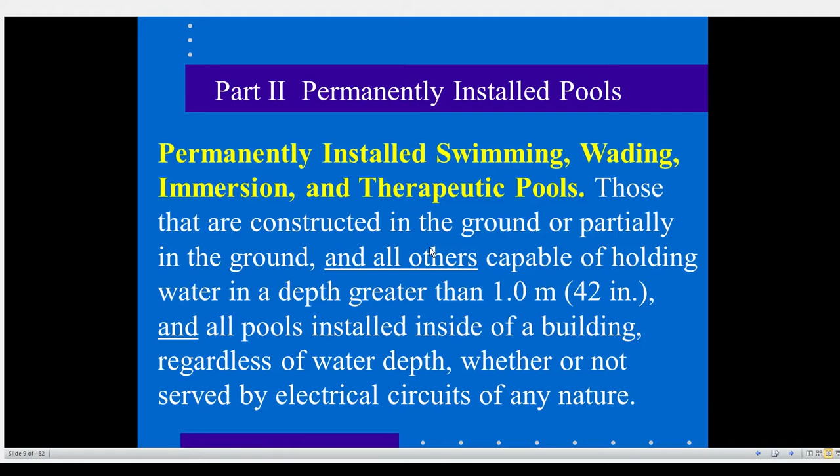And all pools installed inside of a building, regardless of the water depth, whether or not served by electrical circuits of any nature. So it doesn't matter whether electricity is to it or not. Okay, so if it's in the ground, partially in the ground, or it's inside of a building, and it's capable of holding water at a depth greater than 42 inches, then it's going to be considered a permanently installed pool. And these are what you have here.

This right here is partially in the ground, so it is still permanently installed. This one's all in the ground. Here's some indoor ones. Remember we said it doesn't really matter on that. All indoors are considered permanently installed pools. Here's a pool right here that's actually not a polymeric wall. This is more of a rigid construction. But beyond that, its depth is 48 inches. So since it is beyond 42, it is not designed to break down like a storable pool.

In fact, they come in here and weed eat around it, I guess. So these aren't inflatable or polymeric sidewalls. These are rigid sidewalls, with structural framing members. This is a permanently installed pool by virtue of depth and by virtue of the fact it doesn't meet the storable pool requirement. So what is a storable swimming pool?

Storable swimming, wading, and immersion pools, or storable portable pools, spas, or hot tubs, are those that are constructed on, that's a key component, on or above the ground, and are capable of holding water to a maximum depth of 42 inches. So if it's on or above and it holds only up to 42 inches of water, then we've got a storable pool. Or a pool, spa, or hot tub with non-metallic molded polymeric walls. That also is going to be restricted to up to 42 inches in order to be considered a storable pool.

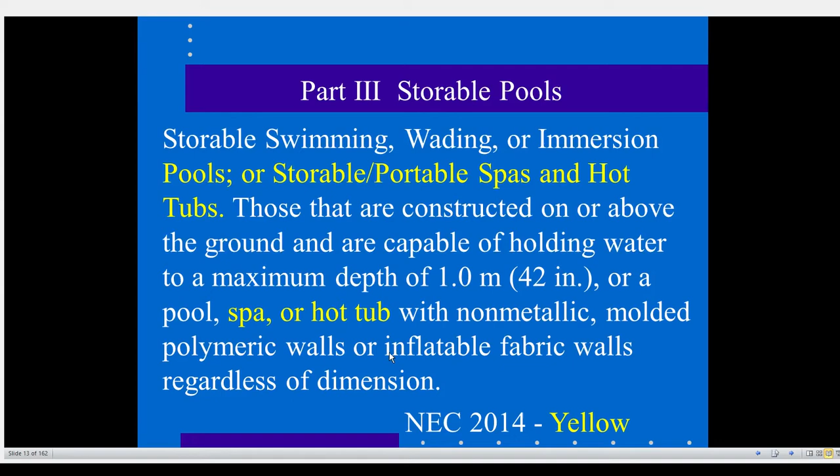And then, of course, you go on to say inflatable fabric wall, regardless of dimensions. Doesn't matter how deep the pool is at that point. If it's an inflatable fabric wall type of pool, we'll see a picture of one in a minute, then it is a storable pool. And there's the storable pool right there.

Now, the one thing to remember in these pools, again, we use an example of this pool here. These are not polymeric walls, I can promise you that. This is the rigid support. This is not designed to be broken down. But I will remind you that if it's a storable pool, it has a maximum depth of 42 inches. If it's a permanently installed pool, it's going to be more than 42 inches. Or if it's in the ground or partially in the ground, it's automatically going to be considered a permanently installed pool.

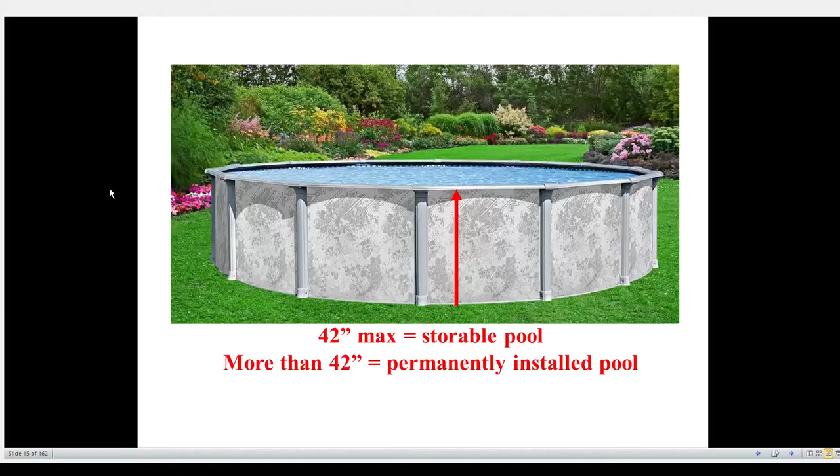In certain parts that we get to later, we're going to be dealing with spas and hot tubs. So what is a spa and hot tub? Well, a hydromassage pool or tub for recreational or therapeutic use, not located in a healthcare facility, designed for immersion of users, and usually having a filter, a heater, a motor-driven blower, what have you. It may be installed indoors or outdoors.

It's kind of irrelevant. Obviously, you're going to see later when we talk about outdoor spas or indoor spas, whether or not they're listed for outdoor and some of the applications for their use. But it'll be installed indoors, outdoors, on the ground or supporting structure, or in the ground or supporting structure. So it could be actually in the decking material or in the patio, if you will.

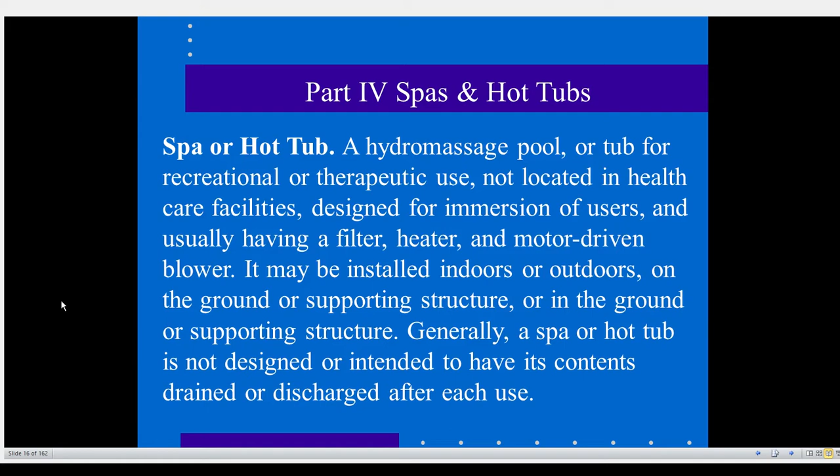Generally, a spa or hot tub is not designed or intended to have its contents drained and discharged after each use. So that's an important concept here. You're not going to drain these after. These hold hundreds of gallons of water, so we wouldn't get into that. Unlike a hydromassage bathtub, which you would drain every time.

We're going to get into spas and hot tubs. There's a difference in packaged units. It's a packaged spa and hot tub equipment assembly. It's a factory fabricated unit. It consists of water circulating, heating, and control equipment. Notice it has heating on it, different than a hydromassage bathtub. On a common base, intended to operate a spa or hot tub.

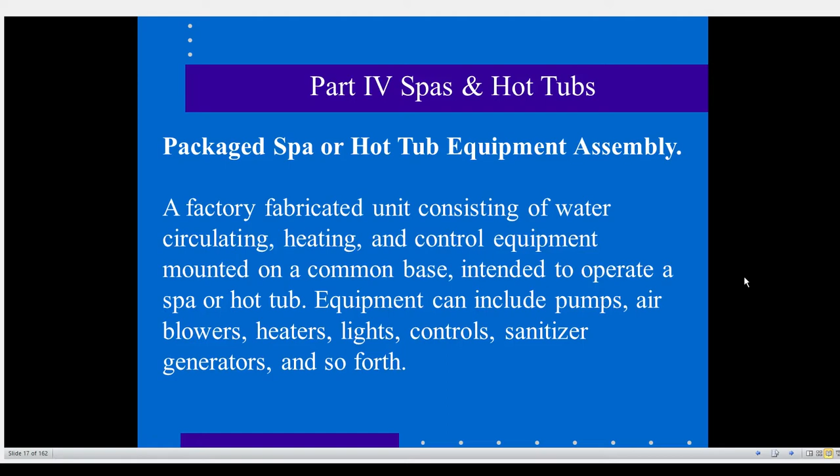Equipment can include pumps, air blowers, heaters, lights, controls, sanitizer generators, and so forth. That is your packaged unit. So here's your packaged unit here. Sits on the deck, sits on the surface. And here's one that actually is going down through the structure.

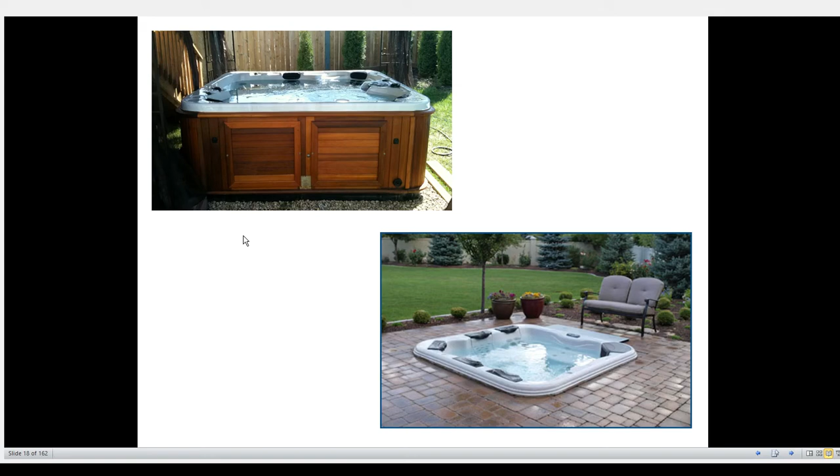Part 5, we're dealing with fountains. We're going to talk about fountains. One thing to remember when we get to fountains is that fountains, ornamental pools, display pools, and reflection pools, the definition does not include drinking fountains, so don't think of fountains and drinking. That you want to deal with 422. You're going to go over to appliances, and they're going to deal with your drinking fountain application.

Permanently installed decorative fountains and reflecting pools. Those are constructed in the ground, on the ground, or in a building in such a manner that they're not designed to be disassembled for storage. They're permanent. They're supposed to stay in place, okay? Portable fountains, you're going to see something that's going to require you to deal with 422. That's not what we're talking about here. These are permanent fountains.

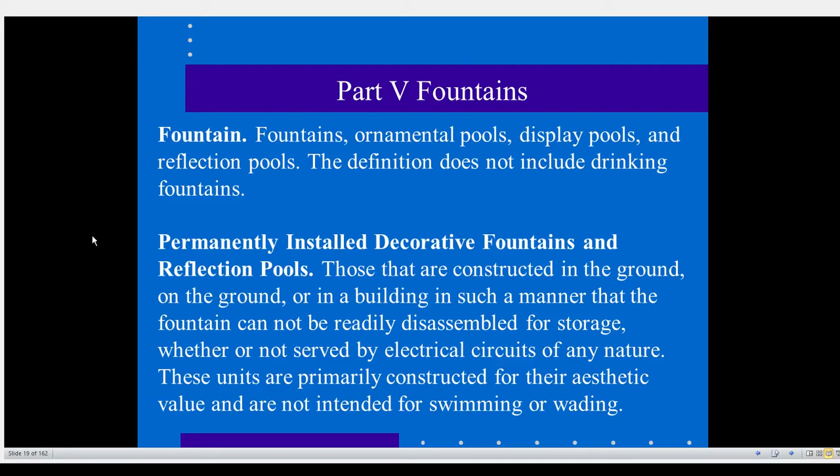All right, and then we're going to deal with pools, tubs, and therapeutic uses. So this is part 6 here. Packaged therapeutic tubs and hydrotherapeutic tank equipment assembly. We will talk about that in brevity when we get to those areas. Basically, they're factory fabricated units consisting of water circulating, heating, and control equipment mounted on a common base. Sounds pretty close to what a normal hot tub would be, right? Intended to operate a therapeutic tub or therapeutic tank. Equipment can include a pump, air blower, heaters, lights, controls, sanitizer generators, and so forth. But these are going to be used for therapeutic or hydrotherapeutic use.

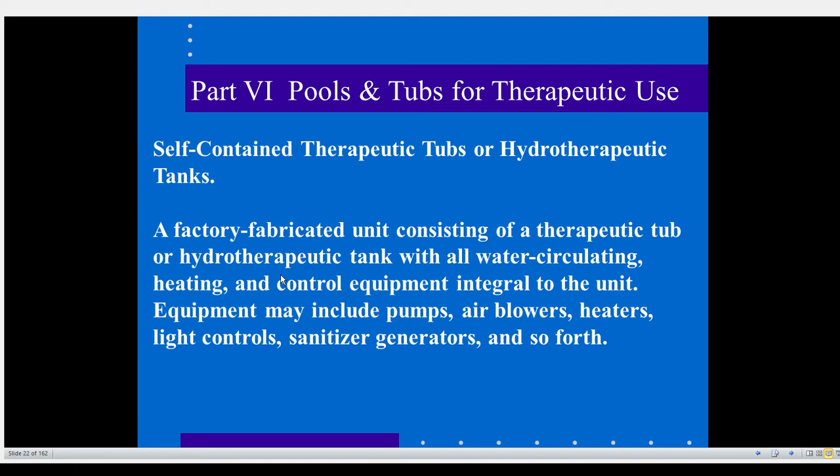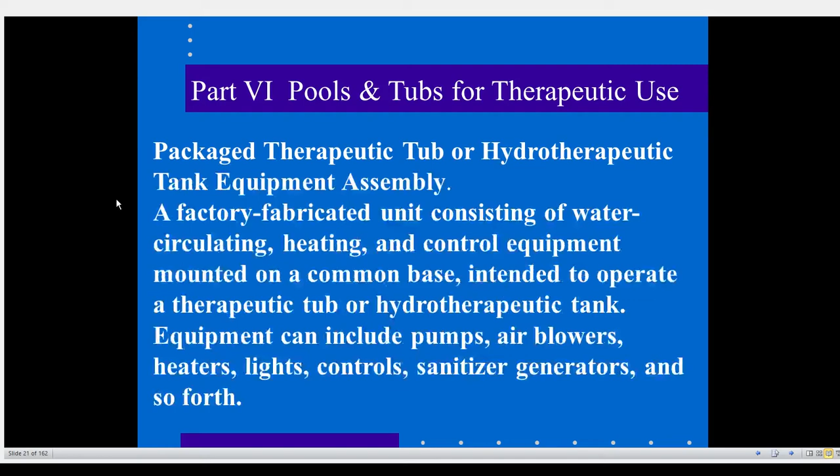Hydromassage bathtubs. Part 7: a hydromassage bathtub is a permanently installed bathtub equipped with a recirculating piping system. That's the plastic piping that typically goes around the bathtub. Pump and the associated equipment. It is designed so it can accept, circulate, and discharge water on each use. So it's not designed like a spa in order to keep the water in there.

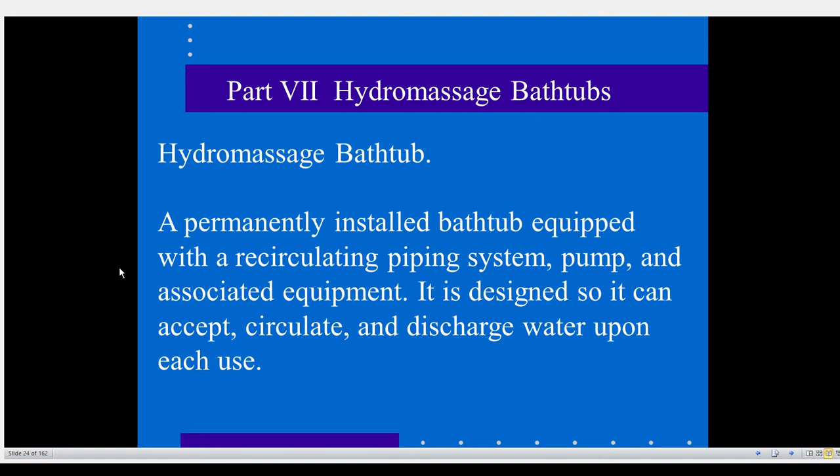All right, so we're in part 1. We want to talk about 680.5, ground fault circuit interrupters. So what are we talking about here? Well, here we've got 3 of them. Remember later when we get to storable pools, when we have a 15-foot cord, for example, and it has integral GFCI protection. This is one of those that's a self-contained application. But you have circuit breaker type and you have receptacle types. All of them are listed, and they are providing the GFCI protection.

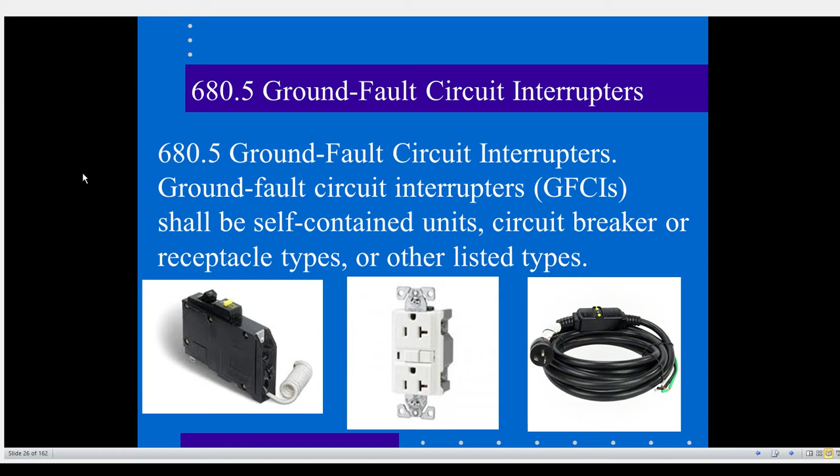It's important to understand how GFCIs, even the receptacles, are wired. Here's an example to show you the power coming in, going to the line side of a GFCI, and then you've got the load side of the GFCI that protects all the receptacles downstream. Now, one thing to remember is even this receptacle, if there were no load side terminations, it still would be GFCI protected, okay? And you test it here. There's a test and a reset button right on the front of it. But just remember there's a line and a load application here.

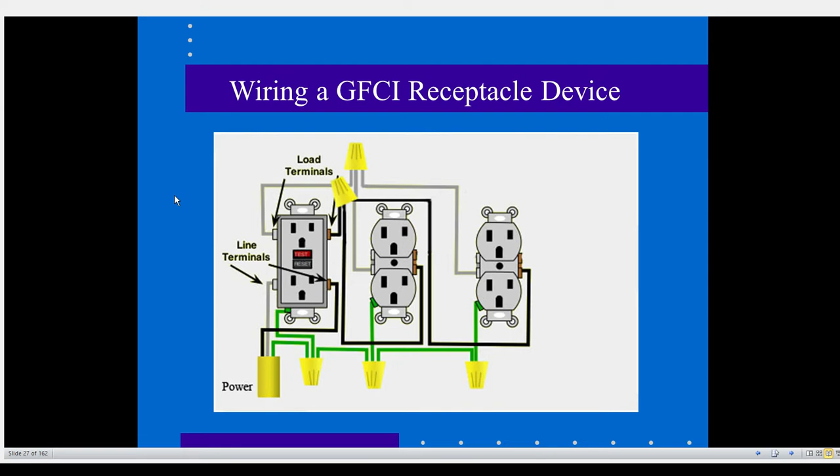All right, when we're dealing with grounding, 680.6. 680.6 dealing with grounding, it says electrical equipment. Now, again, one thing to remember is that Article 250 still takes some important understanding. Chapters 1 through 4 are still going to be the general chapters that have to be enforced generally throughout the code. However, 5, 6, and 7 can modify. And in fact, they modify themselves.

Now, the one thing that's going to remind you that when you're dealing with grounding in 680, you still have to meet Parts 5, 6, and 7 of Article 250, and obviously anything that adds to that in 680. Okay? So you have to remember that. And that can come into play also when we're dealing, like in 680.26, with the equipotential bonding grid and all those requirements. Remember that's a bonding component, that's a localized thing. Don't confuse that with the grounding of a structure or electrodes. Don't get the two confused.

Totally different aspects here. However, you do have equipment that's going to be associated with all of these areas within 680, and there's going to be grounding requirements, most notably equipment grounding applications. So, the code says in 680.6, to just remind you up front, electrical equipment shall be grounded in accordance with Parts 5, 6, and 7 of Article 250 and connected by wiring methods of Chapter 3. So they're going to be those that are listed in Chapter 3, like your rigid, EMT, all those kind of things. Except as modified by this article. So again, 680 can do some modification to those Chapter 3 methods.

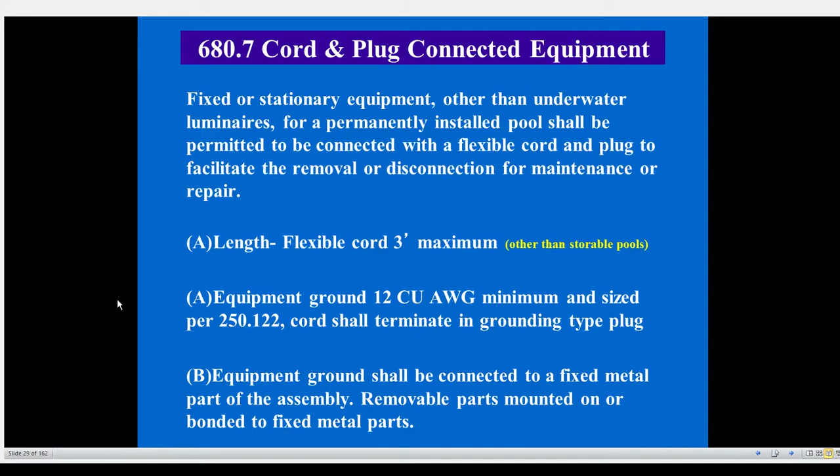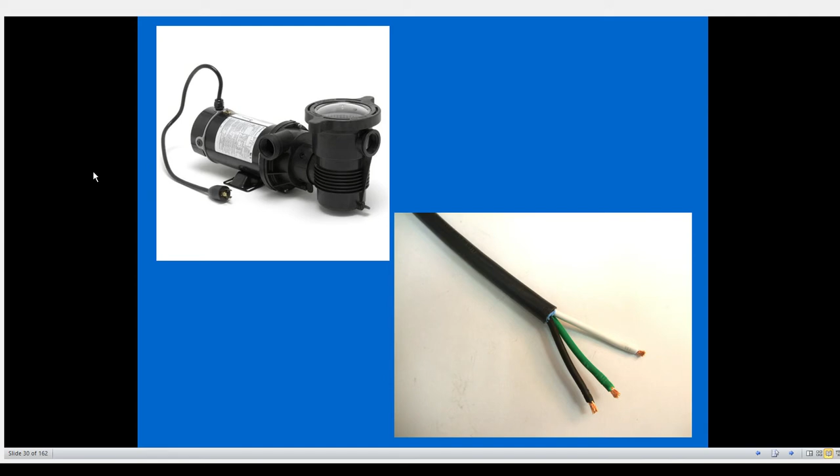Here's a picture of a pool pump here. This is actually a listed pump, listed by a third party, UL, on this one. Notice it says this pump is for use with permanently installed pools only. Do not use it on a storable pool. So that information is right there. That is very beneficial. And you'll notice that it says here that it's for above ground pool pumps. So there's some information on there that's going to give you guidance on how you install this and where it's to be used. Obviously, if a cord was used for this, then it's got to be 3 feet or less.

All right, let's talk about overhead conductor clearances, 680.8. Now, we have an A, B, and a C. We have the communication systems application here, we have the network-powered broadband communication, and we have normal power. Okay, the one I'll go to first is B, so we can knock this one out of the way.

The code says that communications, radio, and television coaxial cables within the scope of Articles 800 through 820 shall be permitted at a height of not less than 10 feet above swimming and wading pools, diving structures, and observation stands, towers, or platforms. So you have a flat-out 10-foot minimum on these communications, and those dealing with 800 through 820 are going to fall in this clearance.

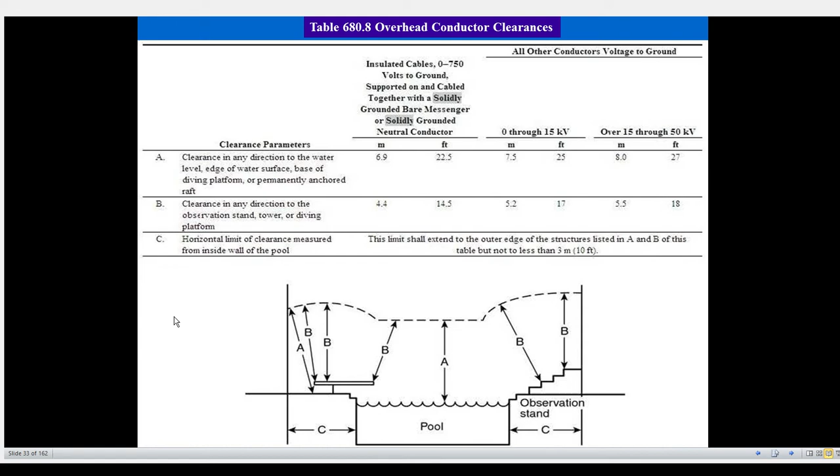Once you start getting down here, you know, it's different. You're not getting a clearance here. This is the limitation mark. Okay. So hopefully that cleared that up and people understand the clearances over the pool application.

All right, 680.10, underground wiring locations shall not be permitted under the pool or within the area extending 5 feet horizontally from the inside wall of the pool. Okay, so no wiring goes within that 5 foot perimeter around the pool. Nothing.

Now, what about if I've got some lighting? Obviously, I do. What if I have some wet niches, which are not required, but if I did have them? I've got wiring now that I've got to get down there to that pool equipment. So, unless this wiring is necessary to supply pool equipment permitted by this article. So, this is telling me that I can go into that 5 feet if I'm supplying the wiring methods to get down to the necessary pool equipment.

One thing I'll remind you: once you get into this 5 foot zone, the depth requirement for that wiring method that gets down to that necessary pool equipment has to be in accordance with 300.5, not 680.10. So what are the cover requirements in 680.10? That leads us to the last paragraph. You can't have any wiring in the 5 foot perimeter, but if you've got to run branch circuits to the pool equipment, then we'll let you put it in there. You've got to meet the depth requirements of 300.5, which is the normal underground raceways and cables requirement.

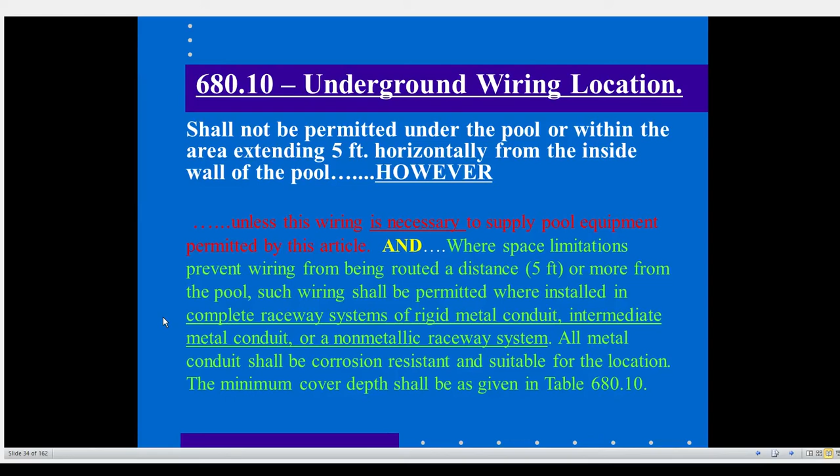Now, why I think this is correct is because in the 2017, I believe, they're going away from the table and they're going to reference 300.5, because those depths are pretty comparable to what we have here in 680.10, with the exception probably of the non-metallic one. I believe it's 4 here, and they've got it 6 here, so a little more restrictive in 680.10. But again, you've got a 4-inch slab over top of it. So I think you'll see in 2017 this table disappear. Could be wrong. But at any rate, this depth has to do with those raceways that are there because of spatial limitations.

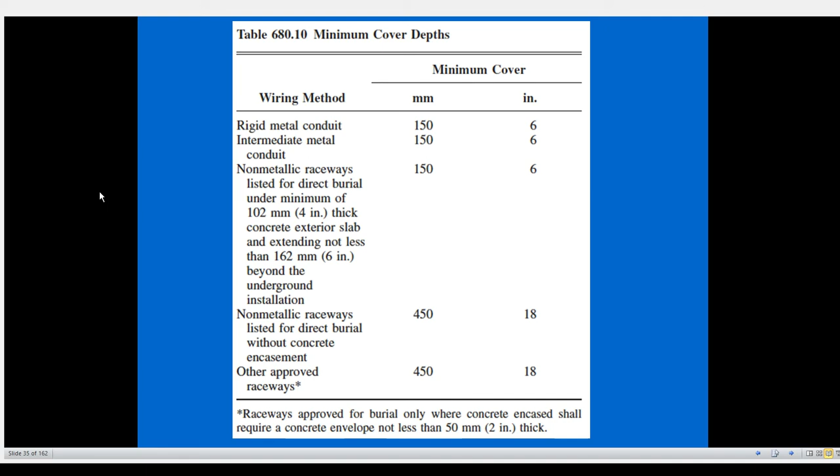680.12, maintenance disconnecting means. You're going to see this referred to in fountains, in spas and hot tubs. You're going to see this a lot, and you need to understand what we're dealing with here.

What it says is, one or more means to simultaneously disconnect all ungrounded conductors shall be provided for the utilization equipment other than lighting. So if it's a spa, for example, and I've got a 50 amp, 240 volt application, that disconnect needs to simultaneously disconnect those ungrounded conductors.

So that's kind of what we're talking about here. Now, each means shall be readily accessible and within sight, and within sight is a defined term in Article 100. Shall be within sight from the equipment and shall be located at least 5 feet horizontally from the inside wall of the pool, spa, fountain, or hot tub, unless it's separated from the open water by a permanently installed barrier that provides a 5-foot reach path or greater.

In other words, in order to reach around it, it's going to exceed the shortest path required to reach that disconnect. It would be equivalent to being 5 feet. In other words, you can't reach around and get it from sitting in the pool, spa, or hot tub, or what have you. Okay? And fountain was added in 2014, so you can see that change there.

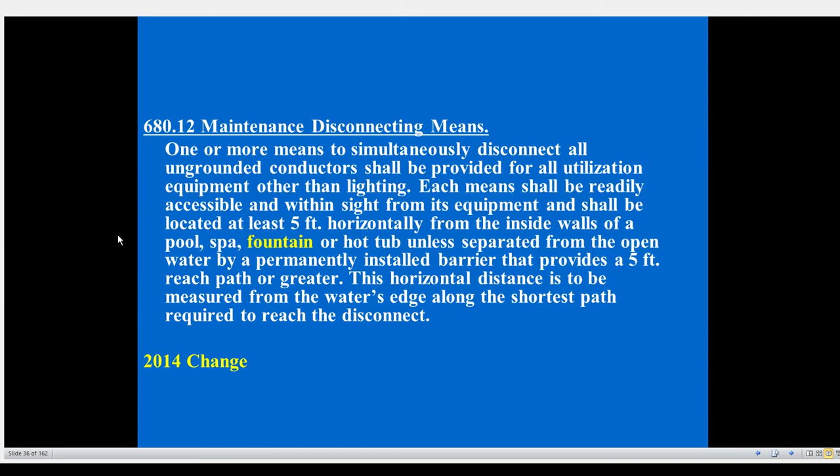These are all examples of disconnects that could be used. This snap switch right here could be used as a disconnect, like for motors or pumps, if it's a horsepower rating that's adequate, depending on the size of the motor and what have you. You got a pull-out disconnect which might be able to be used. You got this panel here which might be within sight and could serve the purpose. And then of course you have a typical cutout box like this that could serve that purpose.

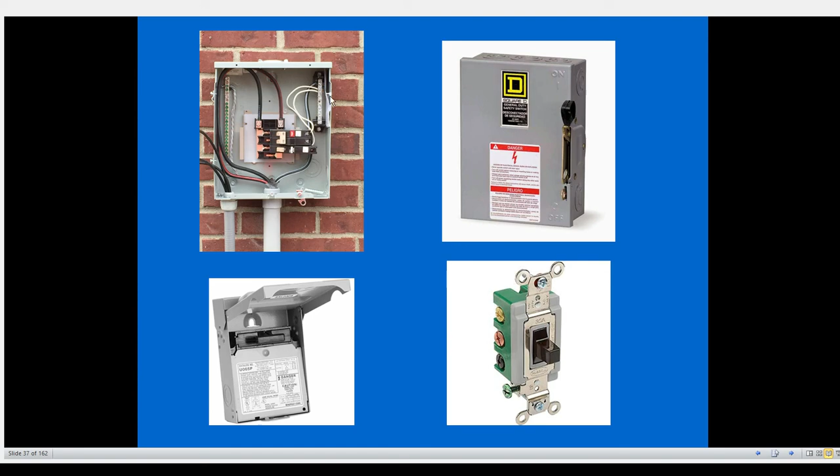Obviously make sure that it is rated for the location where it is to be installed. So the switch would be in an FS wet location box. This looks like a NEMA 3R enclosure. This looks like this has NEMA 3R applications to it. And this, I do see some knockouts, but I think this is also a 3R application, might even be more than that. But anyway, this is the disconnecting means as well. So all of these could be acceptable depending on the location and where you install them.

All right, so let's come on back here to me.

All right, so you made it through part 1. Now when we get to part 2, 3, 4, 5, 6, and 7, we might redundantly go back and talk about some of those definitions so we can make sure we understand where we're at. Hopefully you've built on this by watching part 1 here, and then we'll go to part 2 and part 3 and so on. And that gives you something to build on, because if I do it this way, then you can come back and watch it at a later date and watch whatever part's more important to you.

Rather than sit and watch the whole thing, if I have an application where I only need to deal with a hot tub and spa, then I can go and watch the episode on hot tub and spa and not have to watch everything else. But the general requirements I'm going to cover each time so that we hammer that home, okay? Hopefully you've enjoyed this presentation.

For those that watched our 6-hour seminar, I'm sorry, it just didn't record it. Now, hopefully this one recorded.